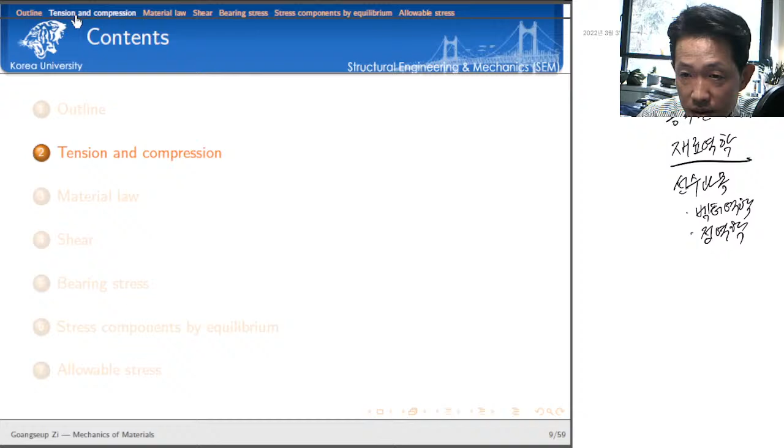Okay, so let's talk about tension and compression. If you click the tab here, you can move to tension and compression very quickly. So here in this lecture note, the learning objectives are here.

We want to understand the flow of analysis first, and then I'd like to emphasize the three conditions describing a mechanical system. We also want to talk about the concept of normal stress in this section of tension and compression, and also normal strain.

To describe the characteristics of materials, we want to talk about the concept of elastic modulus, and then the yield stress, so-called yield stress, and the ultimate stress. And also a similar concept to elastic modulus, we want to define the concept of shear modulus, G. So we use G to describe the shear modulus.

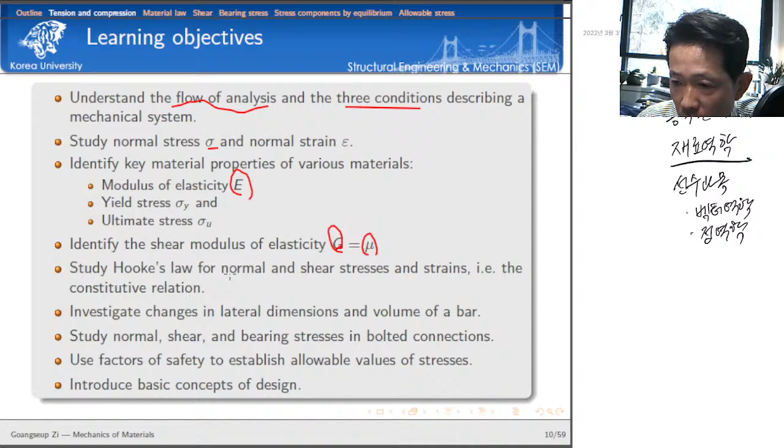In some applications, they use mu instead of G. We'll talk about Hooke's law to describe the relation between stress and strain in these uniaxial problems. And then we'd like to investigate the change in the lateral dimensions, the volume of a bar, to define so-called Poisson's ratio. We'll talk about bearing stress and the normal and shear stress concepts in bolted connections.

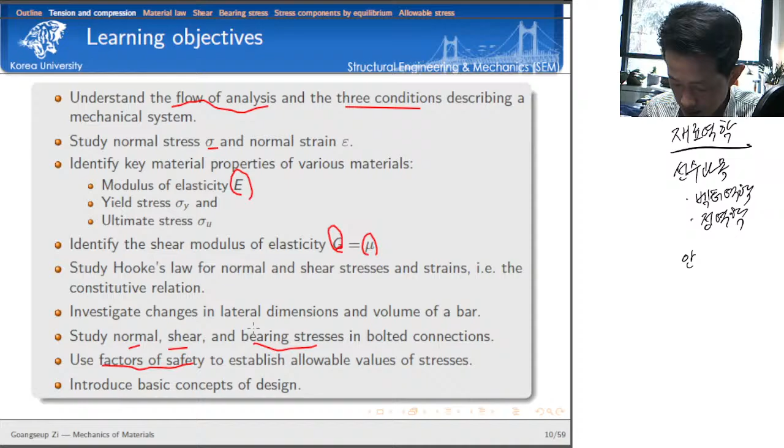And then we'll define the factor of safety, the concept of factor of safety. The factor of safety is called in Korean 안전율. Okay, this is factor of safety.

All right, now let's talk about the flow of analysis. I devised a diagram to explain the flow of analysis for the structural system for my students. So we have to consider two different scales. The first one is structural scale, and the second scale is material point scale.

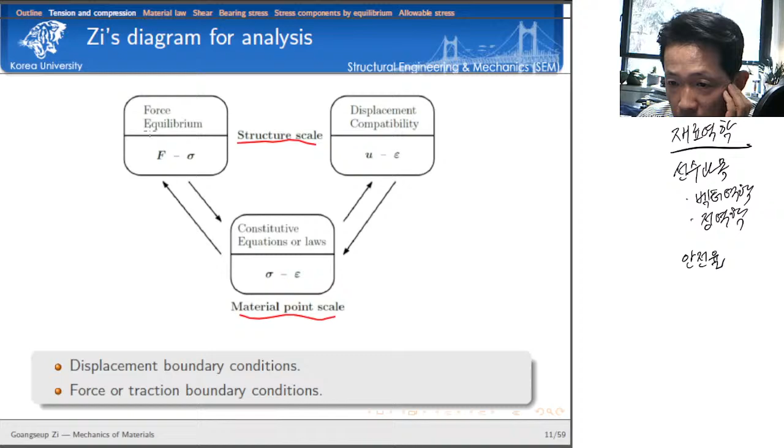At the structural scale, we have two different equations. The first one is force equilibrium. In the force equilibrium conditions, we consider the relation between the different forces, from the external forces and also internal forces.

The second one is displacement compatibility. Here we define the motion, the deformation of the structural system, using the displacement field. This is a vector - make sure this is a vector field. And the force is also a vector field.

Using the force equilibrium, we can extract the information of stress. So once we have the information of stress from this force equilibrium, we toss the information of stress to the material point. Here we use so-called constitutive equations or the material law.

Constitutive equation in Korean is called 구성방정식.

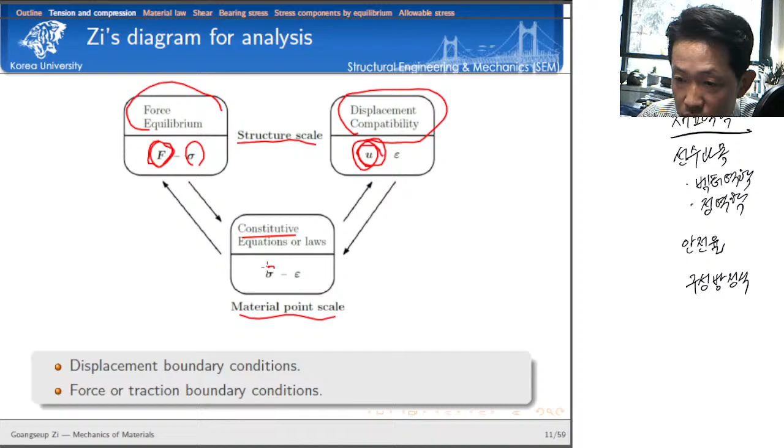This constitutive law makes a relation between the stress and strain. Although I do not explain what's stress and what's strain right now, at this moment please pay attention to the flow of the information - this is more important. We'll discuss what's stress, how to calculate stress, and what's strain.

So what is important is that we have the information of stress and strain only at the material point scale. So once using the information of stress, if you calculate the information of strain, only the strain is tossed to the displacement compatibility to obtain the information of displacement.

Look at this. On the force equilibrium side, we have external forces. Using these external forces, we extract information of stress. Only the stress is tossed to the material point - we do not consider any forces there. At the material point, we accept only the stress to obtain the information of strain. And then here it's the same: once we have the information of strain, the strain is tossed to the displacement.

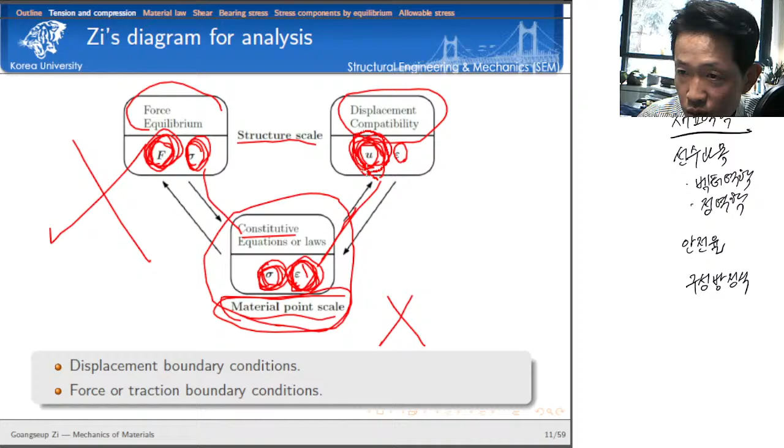Make sure that here in this flow, we do not have any information of stress, okay? So we accept the strain to get the information of displacement. Also, you can take the opposite flow of analysis. We start from the displacement first, and once we have the displacement field to describe the deformation, then we calculate the strain.

Then we toss only the information of strain to the material point. Then we calculate the corresponding stress. The corresponding stress is tossed to the force equilibrium side to calculate all the reactions and check the force equilibrium condition. Okay?

And to complement the flow of analysis, for example, here we can set displacement boundary conditions, such that we describe how my structures are supported. And then also we can prescribe the information of external forces. These are boundary conditions, okay? We have boundary condition, BC. So on the right hand side, we have displacement boundary conditions. And on the left hand side, we have force boundary conditions.

Do you have any questions for this diagram? This diagram is very useful. And this diagram summarizes the flow of analysis in a very simple way. Okay, here we have force equilibrium. So let me talk about the force equilibrium condition further.

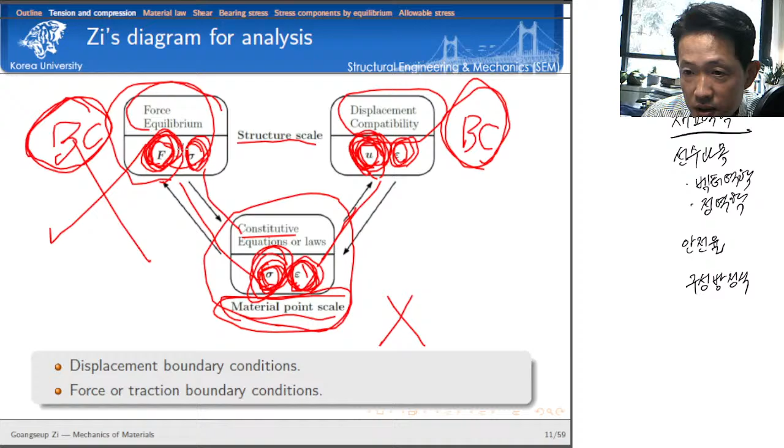So force equilibrium, to check the force equilibrium, we use Newton's second law. If you already studied elementary physics, then you are already very familiar with Newton's second law. So Newton's second law is this. Let's imagine we have a body. If you consider the sum of all the force components acting on the body, that should be equal to the mass of the body times the acceleration of the body. This is Newton's second law.

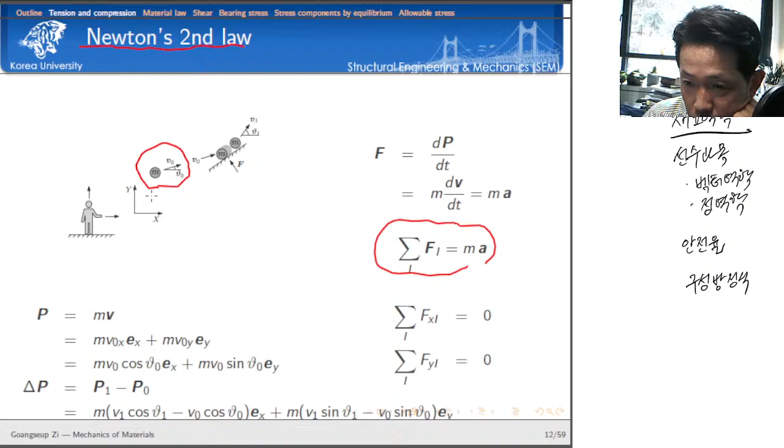To understand Newton's second law, we have to start from the definition of the force. Okay, let's imagine that we have a body whose mass is given by m here. The initial velocity is v naught. And to calculate further, we have to introduce a coordinate system, isn't it? Before any analysis and before any mathematical calculation, we need to define a coordinate system first. Otherwise, we cannot do any calculation, isn't it? So let's introduce this Cartesian coordinate system.

So once we have this Cartesian coordinate system, I can decompose this momentum. The mass times velocity is the momentum, given by p. This is also a vector, because the velocity is a vector. And this velocity can be decomposed into two different components following the directions of these orthogonal coordinate axes, in the x direction and y direction, isn't it? The v naught x is the velocity projection to the x direction. Make sure here e_x represents the unit normal in the x direction. The e_y is also the unit normal in the y direction.

If you are familiar with trigonometric functions, we can easily calculate the projection in the x direction using the magnitude of the initial vector v naught. The v naught times cosine theta naught is the projection of this velocity to the x direction. Also, the y direction projection can be easily calculated in this way using the sine function.

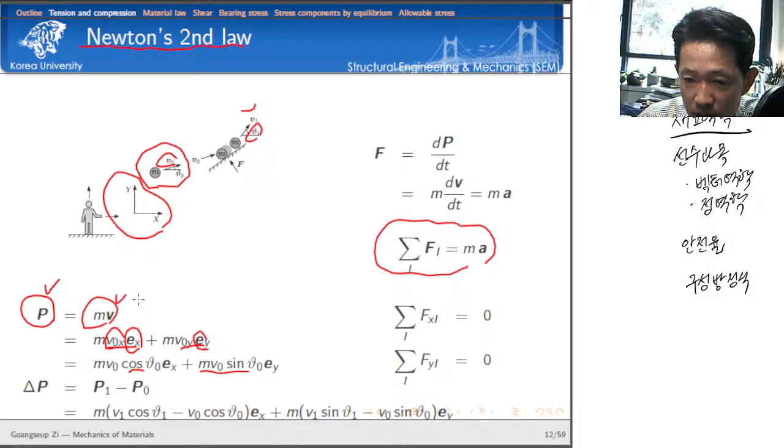The change of momentum can be calculated by vector mechanics. The momentum here is given by p1, minus the initial momentum p naught. Then if you use vector mechanics with this coordinate system, we can calculate the change of momentum very easily. So according to Newton's definition, the force is defined this way. The force vector, the underbar means a vector, is given by the limit as the time approaches an infinitely small time, of delta p over delta t. Okay, this is the definition of force.

So according to Newton's second law, if you have any change in momentum, the change of momentum is equal to the mass times the acceleration. So let's imagine that we have a stationary system. A stationary system means the acceleration should be equal to 0.

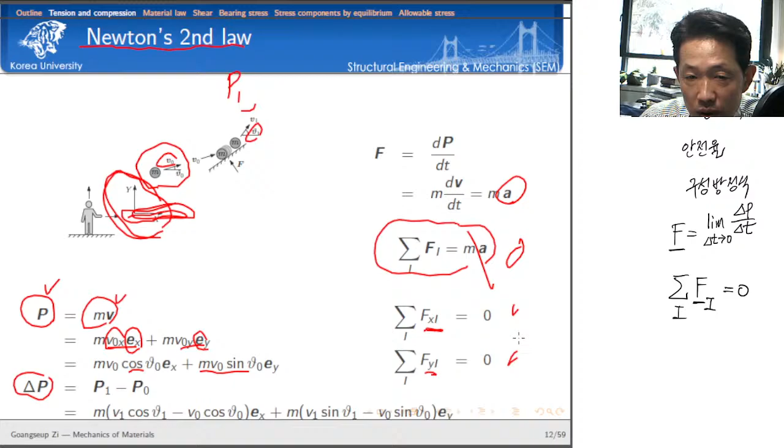For our structural analysis, we use these conditions to satisfy the sum of all force vectors acting on this structural body equal to zero, which means we check the force component in the x direction. Because we have this coordinate system, we have to check each component individually: the x component and the y component. These should be equal to zero in two-dimensional problems. For three-dimensional problems, we also have to consider the z component, isn't it right?

Let me talk about the coordinate system further. Typically we use x, y, and z for the x direction, y direction, and z direction. Depending on the authors, like in advanced research papers, instead of using the x, y, z coordinate system, they just name it x1, x2, x3. These are the same.

Let's talk about the normal vector. In your elemental physics textbook, typically they use nx, also ny, and nz. But according to other notations, instead of using this, n1, n2, n3 is the same. Also we may want to use ex, ey, ez - all the same notation. And also instead of using x, e1, e2, and e3. Please do not confuse the different notations.

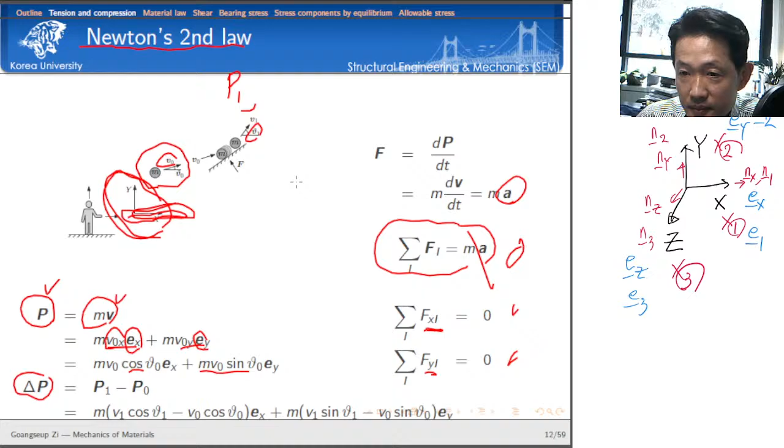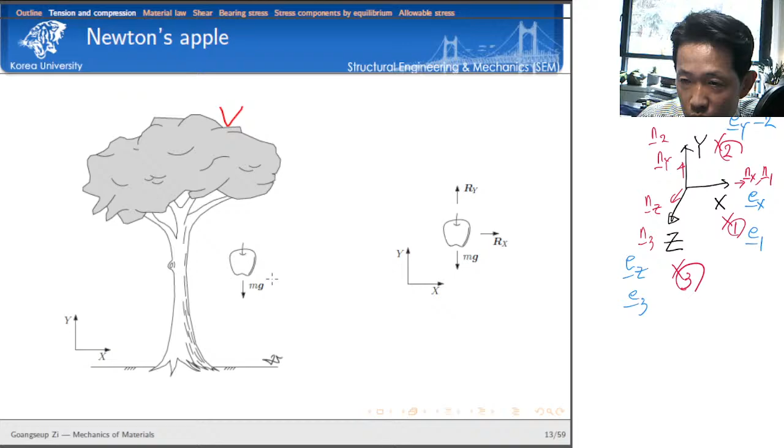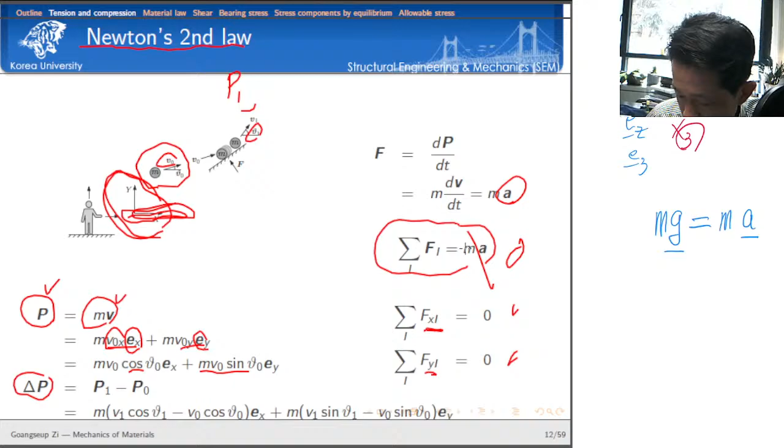Now let's talk about Newton's apple. This is a really famous apple, isn't it right? Let's imagine we have an apple tree and an apple is falling to the ground - free falling. Because of gravity, this apple is subjected to a non-zero force, which is equal to the gravity, mass times acceleration. Looking at Newton's second law, force equals mass times acceleration, which means the acceleration of the apple is characterized by the gravity acceleration. If you look at the apple, let's imagine a small piece of apple here.

All the points in this apple are subject to the same gravity. This kind of force is called body force, because the force is acting on every point, every piece of my domain. Here domain means, in Korean, 영역. My domain of consideration is my apple.

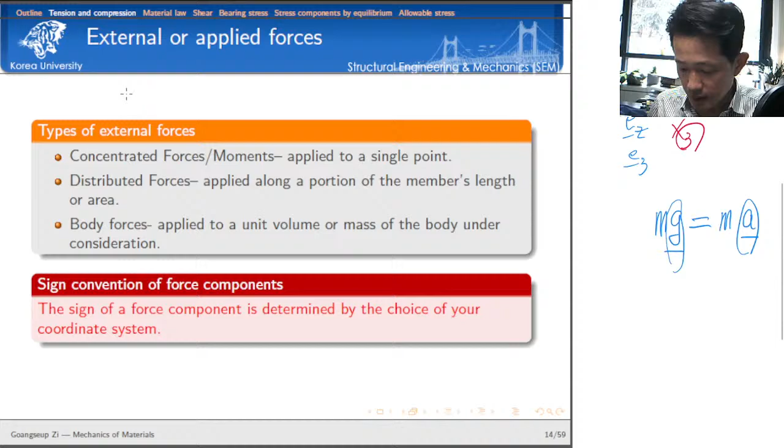I'd like to define different kinds of external forces. Make sure that the gravity has nothing to do with this apple - the gravity is caused by some external action. Let's draw an actual apple here. As I told you, any point is subjected to the same gravity loading. This kind of load is called body force.

Body force is called 체적력. This body force is typically caused by gravity and also magnetic force. These are typical examples of body force.

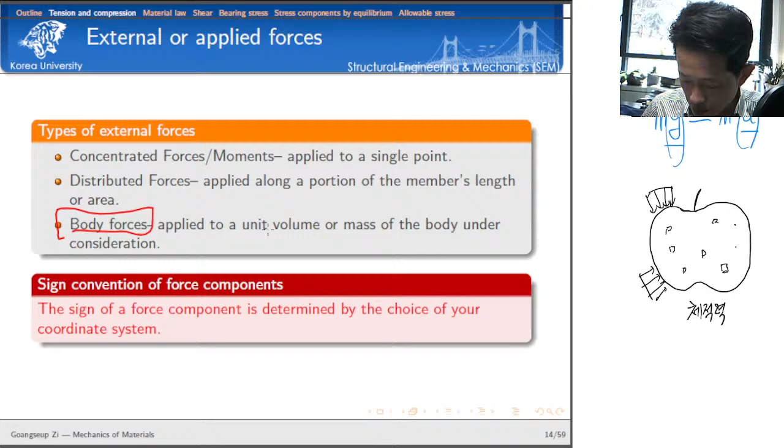If you grab this apple with your hand, we can apply external force from outside, isn't it right? This is called traction, in Korean 표면력. Because if you use your hand, my force is acting on the contact area between my finger and the apple, usually the traction is distributed.

The force is acting over a certain area of my body - that's why traction, 표면력, is typically distributed. But if the distributed area is too small, the force magnitude is concentrated to a very small area, so probably we'd like to approximate that force distribution using concentrated forces - an approximation of that force using a vector. This is called, let me check... correct, yes, this is called 집중하중.

This is called 분포하중. In English, traction, or if you translate 분포하중 directly, distributed load. The concentrated load is an approximation of a certain distributed load over a very small area - this is called concentrated load. Do you have any questions up to this point? No questions.

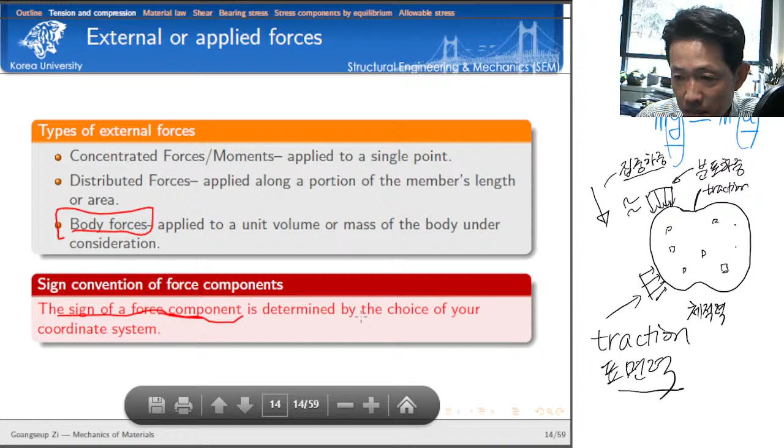Probably here you are interested in the sign of force component. So make sure that this is really important. The sign of force component must be determined by the choice of your coordinate system.

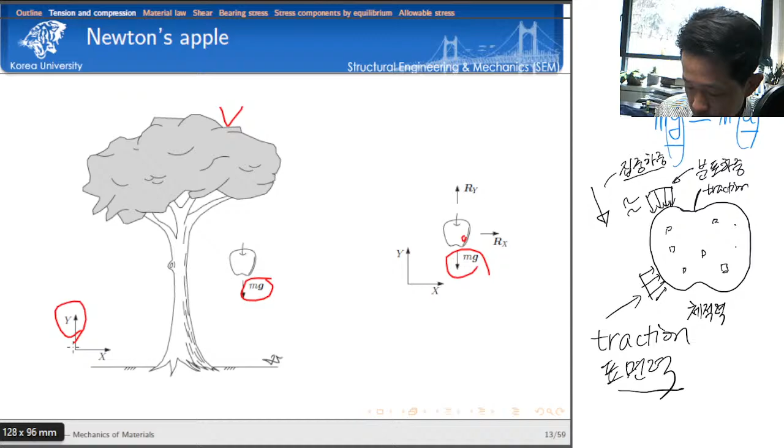Let's go back to Newton's apple here. Okay, so I have force in the downward direction, because my default y coordinate direction is upward. So which means the sign of my gravity acceleration, or I mean the mass times the gravity, here I do not have bar, which means scalar quantity. Because of the choice of coordinate system, this is minus.

Okay, here the bold face means the vector. G bar is a vector, and as in my lecture note, the bold face is also the vector, same thing.

If you measure only the magnitude, if you consider projection, that depends on the choice of the coordinate system. So with this choice, minus. But how about, let's say, if you choose a coordinate system like this, for example, this x and y? If you choose this coordinate system, surprisingly, its sign is changed to positive. So everything depends on the choice of coordinate system.

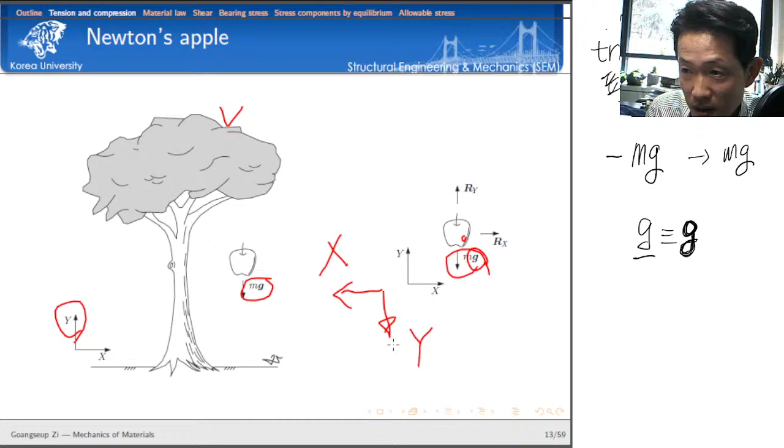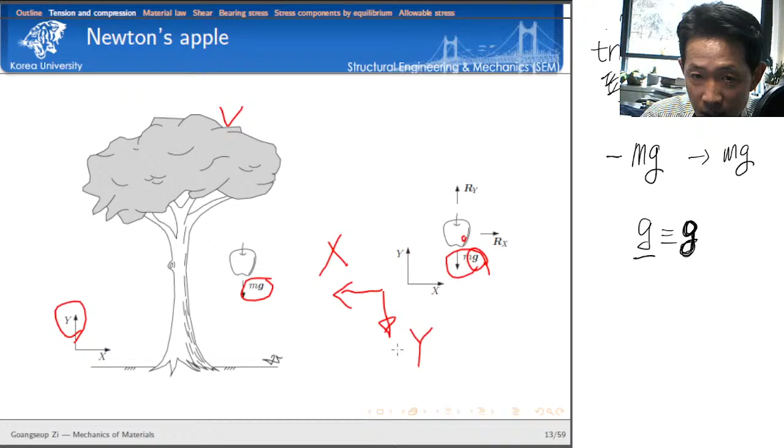Don't be confused with the sign convention of the force components. Make sure the forces are vectors. But force components are scalars. The sign of force component should be determined by the choice of coordinate system.

Okay, next subject is free body diagram. Let's imagine the same mass here, but we have a hanger here. As we discussed already, this mass is subjected to gravity loading, the mass times the gravity acceleration. But because of this hanger, it's in equilibrium. So if we have a structure system in equilibrium, then even if you consider a small part of the structure system, that small part should also be in equilibrium.

So let's consider the small piece here, this part. Now we already understand that we have one external force, the mass times gravity. This is the external force caused by the gravity action. And because we cut here, we have an imaginary cross section. So we don't know what's here.

But according to the force equilibrium, this is my static system, because we consider the small part of my structure system from the original structure system. If you consider all the force components acting on this small piece, ABC here, then the sum of all the forces should be equal to 0 because it's in equilibrium.

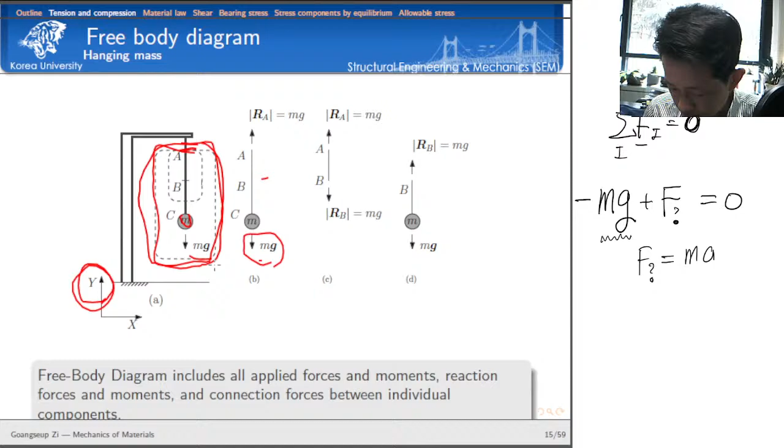So which means I have something more here, something more. So this something more, according to force equilibrium, should be equal to mass times the gravity acceleration. This is called internal force, in Korean 내력. So we need that thing to satisfy the force equilibrium condition. Otherwise, the force equilibrium condition is violated.

So using this free body diagram, we can understand that there must be a certain internal force to satisfy the force equilibrium condition. The free body diagram, in Korean, is called 자유물체도.

Okay, so once we calculate internal force on a cross section, we can consider a further smaller one. Let's consider only the AB segment. We already know that here we must have mg. But to satisfy the force equilibrium, we can easily understand that on the B side, we must have exactly the same quantity, but in opposite direction. That's how we can calculate the internal forces by using the force equilibrium condition.

So here the free body diagram includes all the applied forces and moments, the reaction forces and moments, and the connection forces between the individual components. This is very useful to identify the internal forces in the structural points. Do you have any questions up to here?

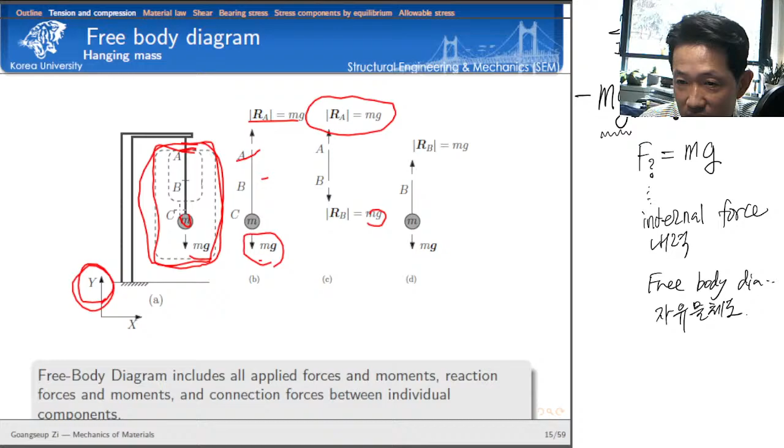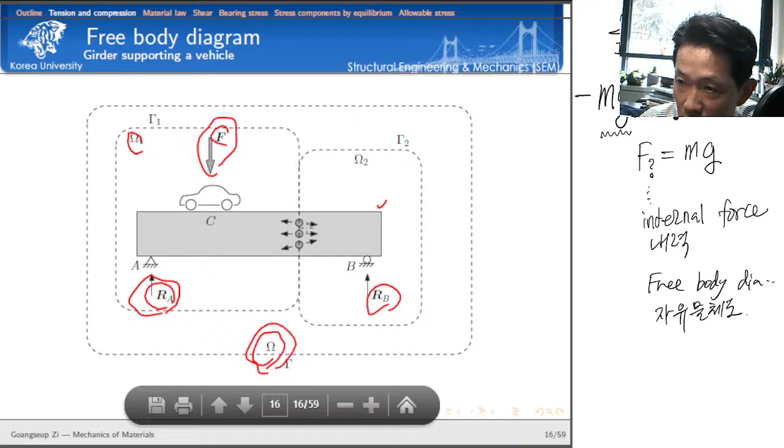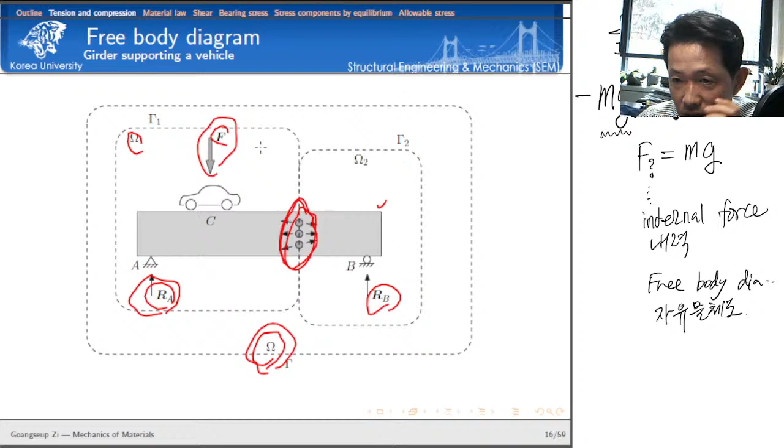This is the entire domain omega. If you consider a small part of the domain, omega 1, I have an external force F here and a reaction force here. If you consider only these two forces, it's obvious the force equilibrium cannot be satisfied. But because we choose a part of the structure from the entire domain, which is subjected to force equilibrium, there must be some additional actions at this cross section. Using force equilibrium, we can calculate the internal forces. This is the role of free body diagram, where to use it.

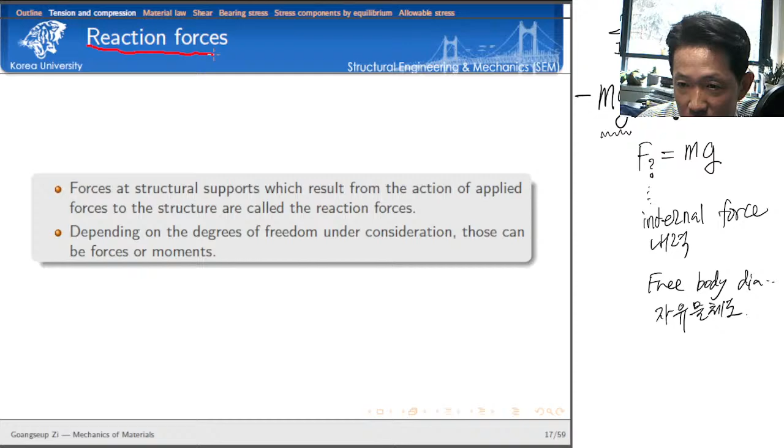Now the next subject is reaction force. Reaction force, in Korean called 반력. The reaction forces, 반력.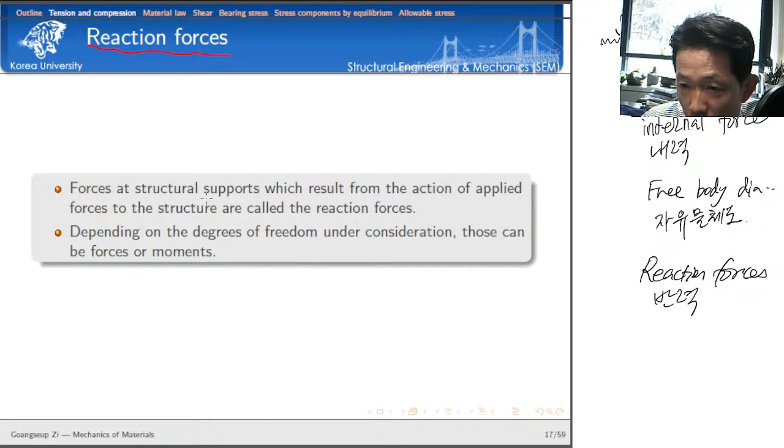Forces at structural support - for example, these are structural supports here. This is a hinge and this is a roller support. We'll discuss the characteristics of different support conditions later, but anyway, all structures must have support conditions.

Let's consider a cantilever here. One side is fixed - this is a fixed support. And how do you call this? This is the free end, 자유단. This is 고정단.

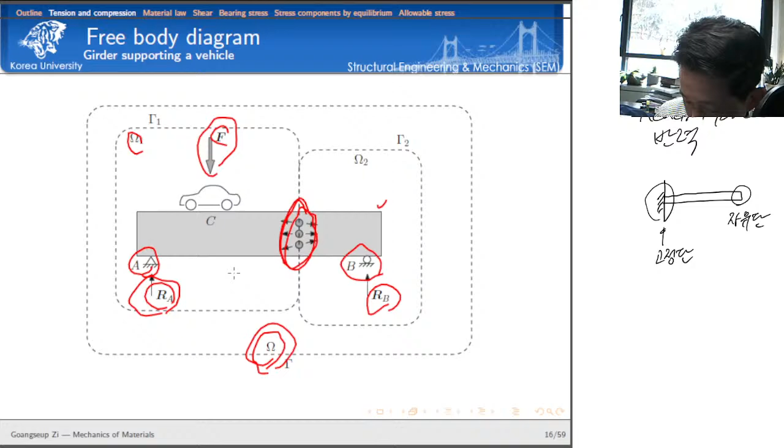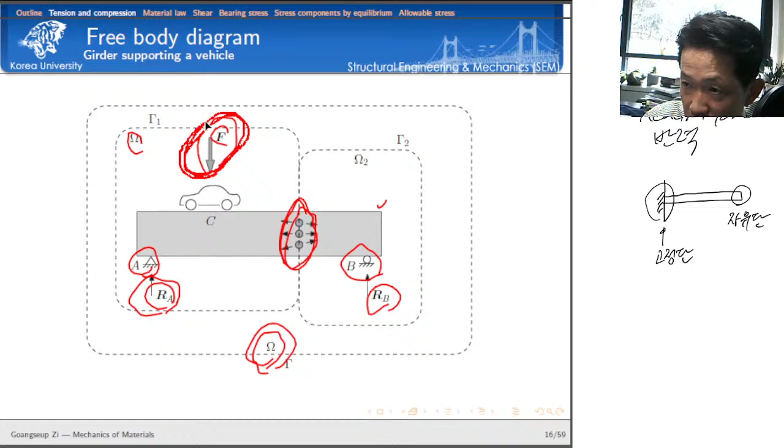The forces at structural support, which result from the action of applied forces to the structure, are called reaction forces. These external forces are obvious because they are given in the problem, but the magnitude of reaction is not given, so we have to calculate it to satisfy the force equilibrium condition, using rules of structural engineering systems.

Depending on the degree of freedom under consideration, those can be force and moment. For example, let's consider this cantilever - we have a force here. To satisfy force equilibrium in the vertical direction, we need one reaction in the vertical direction. And to satisfy moment equilibrium, otherwise the structure would rotate, we need another reaction force here. That's why on this fixed end we have 2 degrees of freedom.

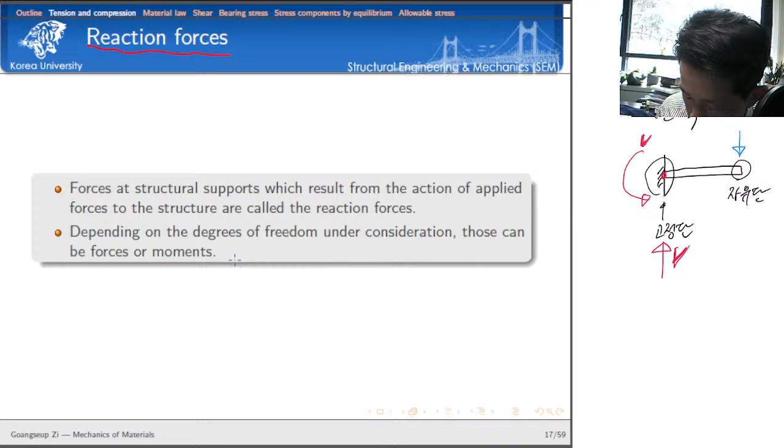First one is for translation, and the second one is for rotation. Even considering a single point, we need 2 degrees of freedom to discuss the reaction to satisfy force equilibrium.

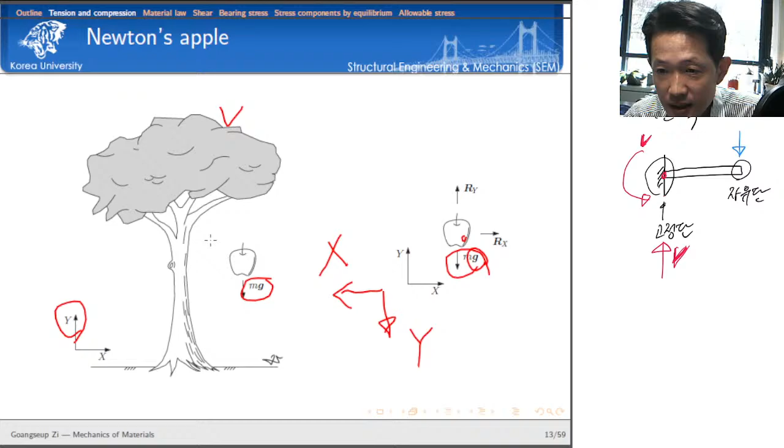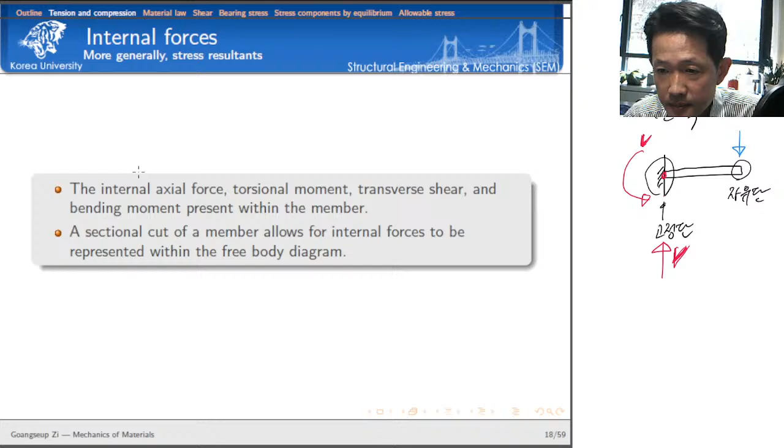Now let's talk about the equilibrium equation. In vector form, the sum of all forces should be equal to 0 in a stationary system. Stationary doesn't mean a static system - stationary means a body moving with the same constant velocity is also a stationary system. If you want a static system, we need to provide a support condition so the structure doesn't move. The equilibrium condition for a stationary system: sum of all external forces should equal 0.

In the general concept of external forces, we can also consider moment - sum of all moments acting on my structural body should be equal to 0. This is the vector form of the force equilibrium condition.

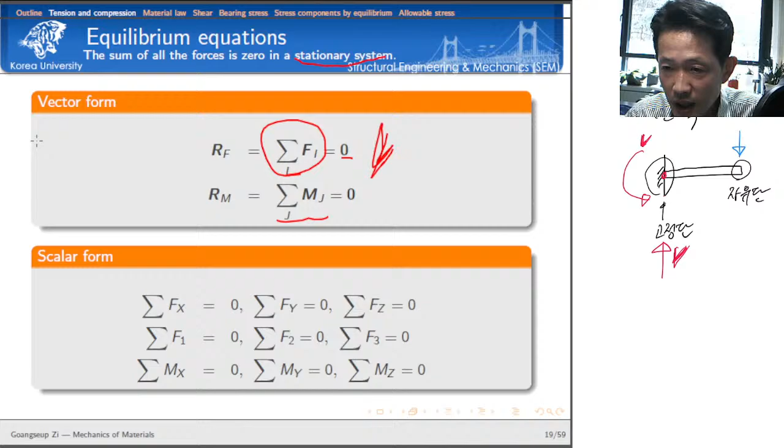Of course, using the vector form, it's not convenient to carry out calculations. It's better to use the scalar form with a coordinate system. First we define a coordinate system, for example x, y, and z. Then we check force equilibrium for each individual force component: sum of forces in the x direction should equal 0, sum of force components in the y direction should equal 0, and the z direction should also equal 0.

Instead of x, y, and z, we may want to use 1, 2, 3 instead. This is more general and more convenient to handle all kinds of formulas, so I prefer to use the indicial notation. But in your textbook, they use x, y, and z, that's why I keep these notations. Sometimes I use 1, 2, 3 for indicial notation. Please keep in mind that they are the same.

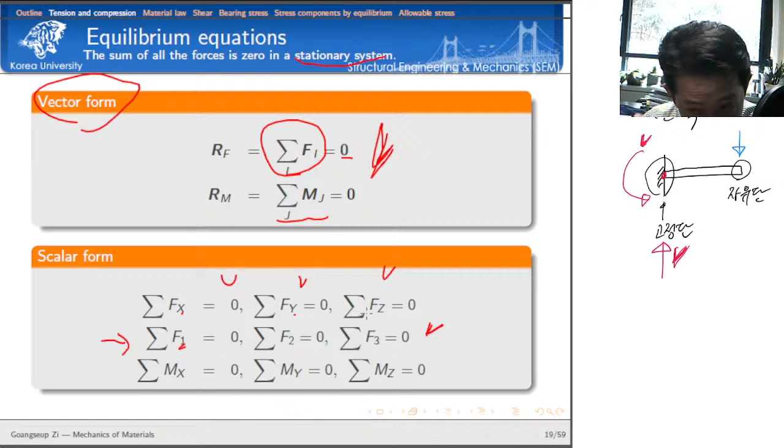Now let's talk about normal stress. Imagine I have a bar here. This bar is subjected to a pair of forces, force P here. And then if you cut here... let's imagine I have a bar. So these two forces are vectors, isn't it, right?

Let's consider force equilibrium. As I told you, before any analysis, we need to introduce a coordinate system. Sum of all the forces in the x direction should be equal to 0. Let's consider the force on the right hand side, this is P. Because of this coordinate system, this is positive P, isn't it? And how about this? This is negative P. So if you consider the force equilibrium, minus P plus P, this is trivial calculation, it is equal to 0. The force equilibrium is beautifully satisfied, isn't it?

So now I want to cut here. I want to consider this free body diagram for this segment. Since we have external force, we already know that, but probably here we have certain action. For example, because we don't know the direction yet, let's consider it's acting in this direction.

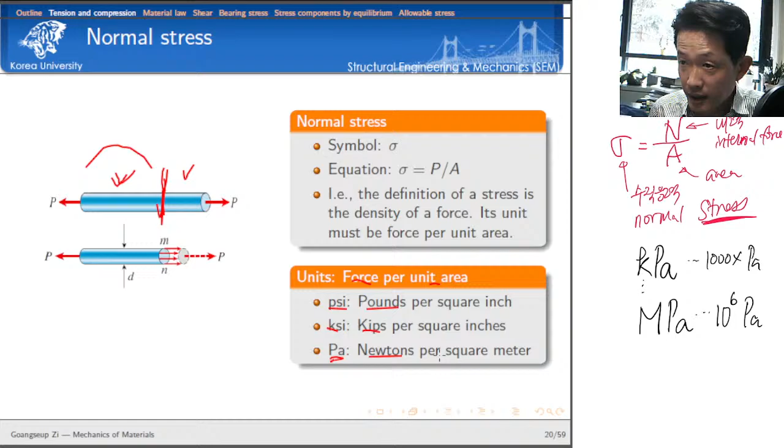For geotechnical application, the kilopascal, K stands for 1,000, 1,000 Pascal. For structural engineering application, we use megapascal, which is 1,000 times kilopascal. Mega means million, isn't it, right? 10 to the power of 6 Pascal. And to define the elastic modulus of concrete and steel, we use the gigapascal. Giga means 10 to the power of 9 Pascal. This is the unit of stress.

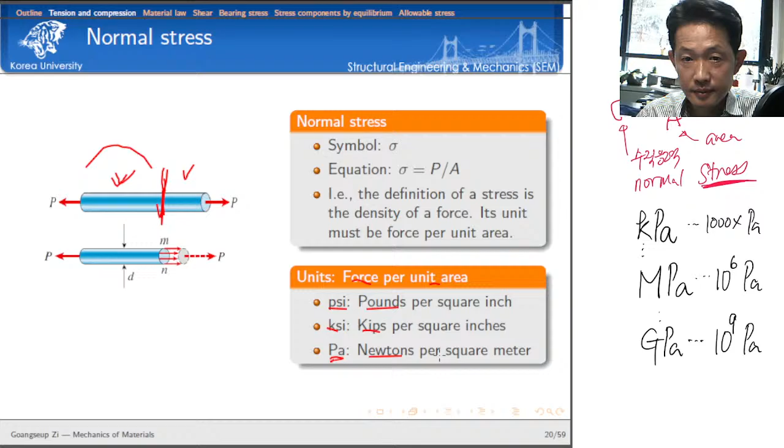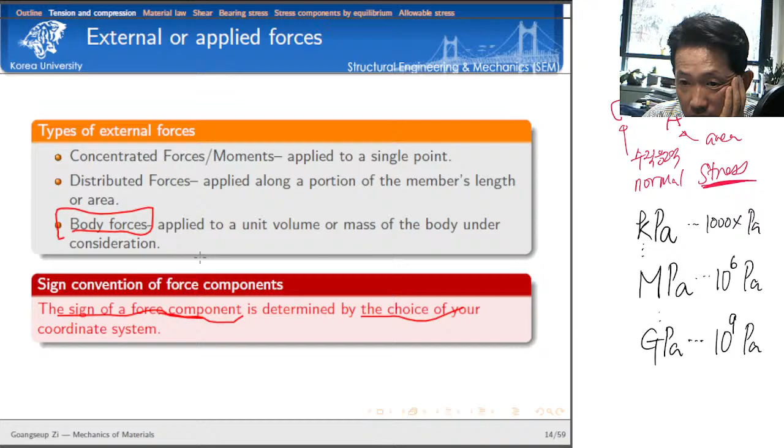And then let's define the normal strain. To define the stress, we only consider force equilibrium.

Now let's define the strain. To define strain, forget about the force stuff. Let's only focus on deformation. What causes the deformation, forget about it. What is important to define a strain is just deformation itself. We want to consider only the deformation and only the motion.

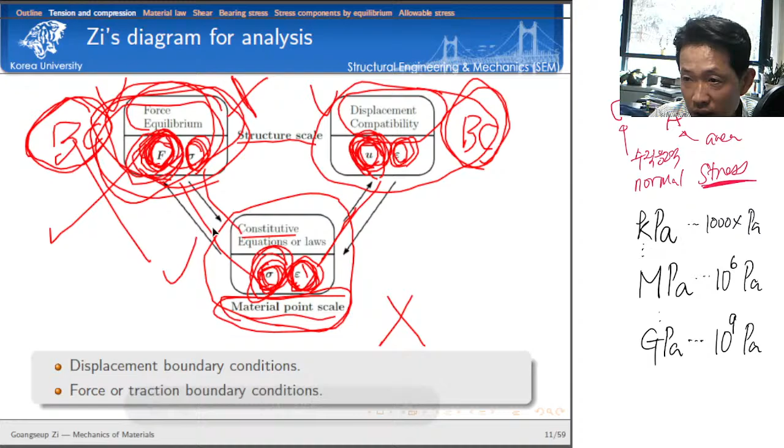Make sure that these three conditions are independent of each other. We consider the flow of information from the displacement compatibility to the constitutive equation to the force equilibrium. Or the force equilibrium, the material law, and displacement compatibility. But these three conditions are independent.

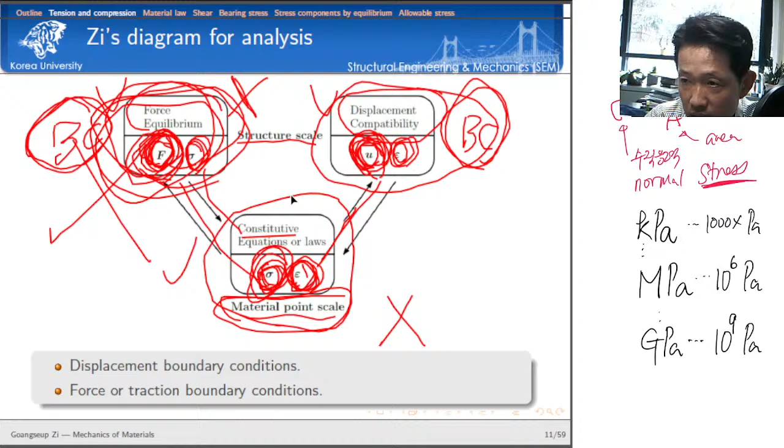So now let's imagine the deformation. Although I have this arrow, let's forget about it. We have an initial body, but this body is stretched by some reason. It might be caused by forces, it might be caused by temperature increase. Anyway, let's say we have length change. Initially the length was measured by capital L, and after the deformation it was measured by L plus delta.

The density of deformation over the distance can be measured by the elongation delta divided by the original length. This is called strain. Because to define a strain, we divide the elongation by the initial length. This is a dimensionless quantity.

To use the definition of strain, we have certain requirements. The first one is the bar is prismatic, meaning there is no change in the cross section. We must have the same cross section from the starting point of the member to the end point. Another requirement is that the material should be homogeneous, meaning we want to use the same material for the overall body of this member. Then we can use this definition of strain.

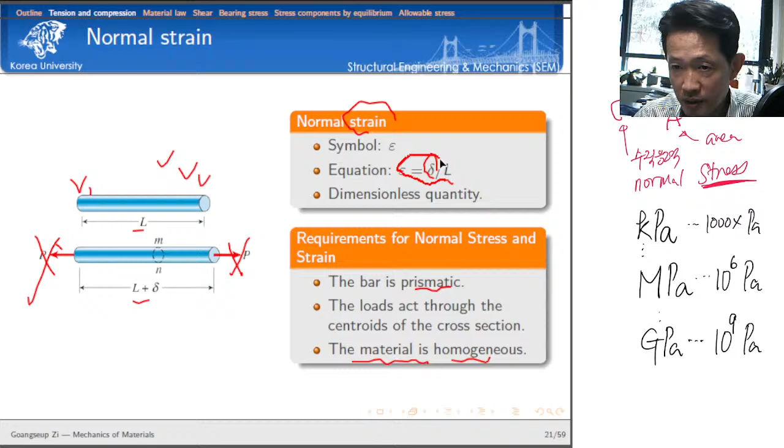So let's talk about examples here. Let's simplify the problem using a two-dimensional configuration. So I have a cylinder, and it is subjected to 26 kilopounds.

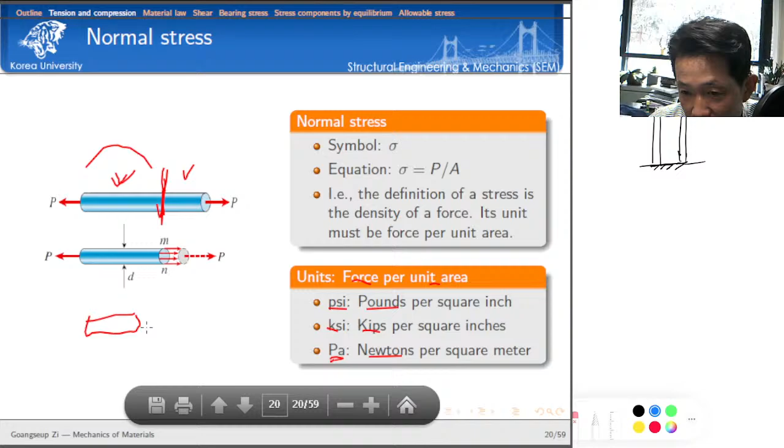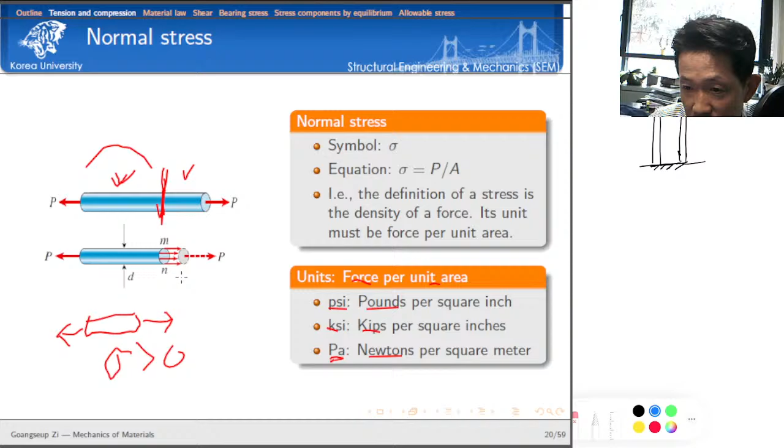Let's try to calculate the stress here. By the way, I didn't mention the sign convention of stress. Here, if the material is stretched, we call this the positive stress. If the material is compressed, then my stress is negative. This is the sign convention of stress - we'll revisit this definition later. For strain, it's the same: if material is elongated, strain is positive; if the material is compressed or shortened, strain is negative.

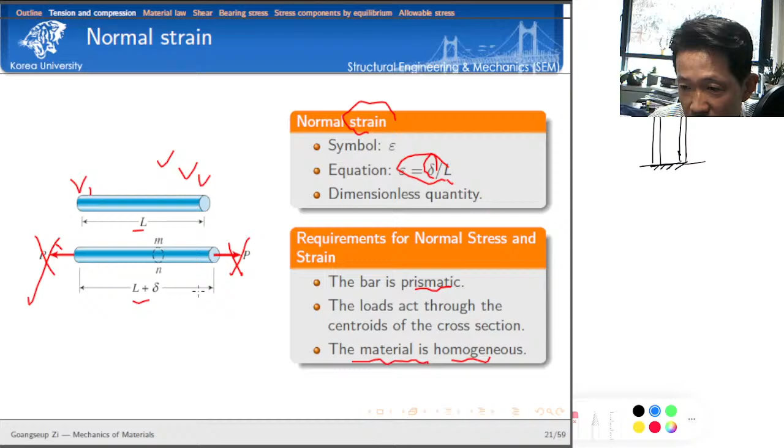Here let's try to calculate the stress quantity. This is called external force. What is the very first step before any analysis? Before any analysis, the very first step is to introduce a coordinate system. Let's define my coordinate system.

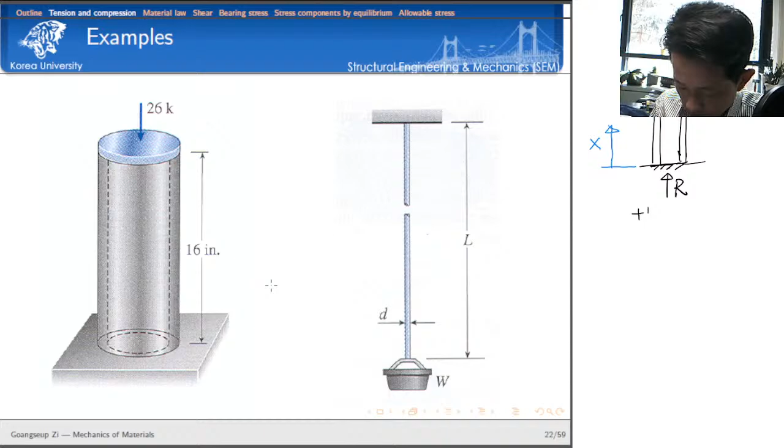And then we need to calculate the reaction. So I must have a certain reaction. Let's try to use force equilibrium: the sum of all the forces in this direction. It follows from this coordinate system that all the force components should be equal to 0. This is the definition of an equilibrium system.

Then R minus - look at this, the direction is downward, but the positive direction according to the definition of my coordinate system is upward. That's why minus 26 kilopounds should be equal to 0. That's why we can determine the magnitude of the reaction very easily. The reaction is equal to 26 kilopounds.

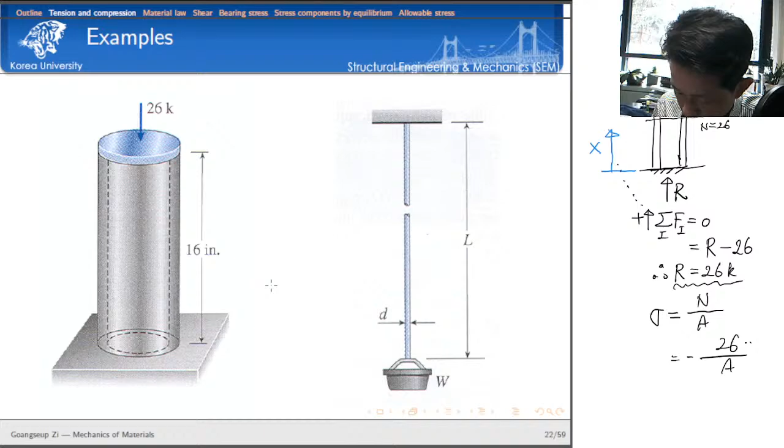So now let's try to calculate the stress. The magnitude of stress by definition is the internal force - if you cut here, I have internal force. Using the free body diagram, my internal force is equal to the magnitude of 26 kilopounds. The internal force divided by area is equal to 26 kilopounds divided by the area. What's the sign? Because the material is compressed, the sign is minus.